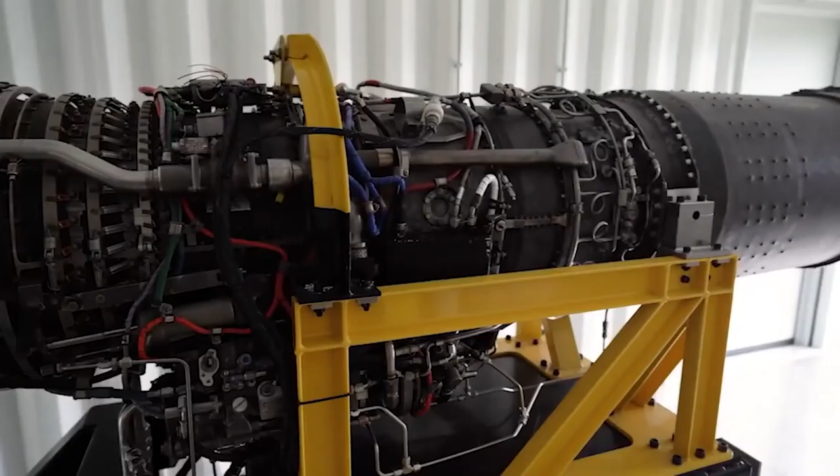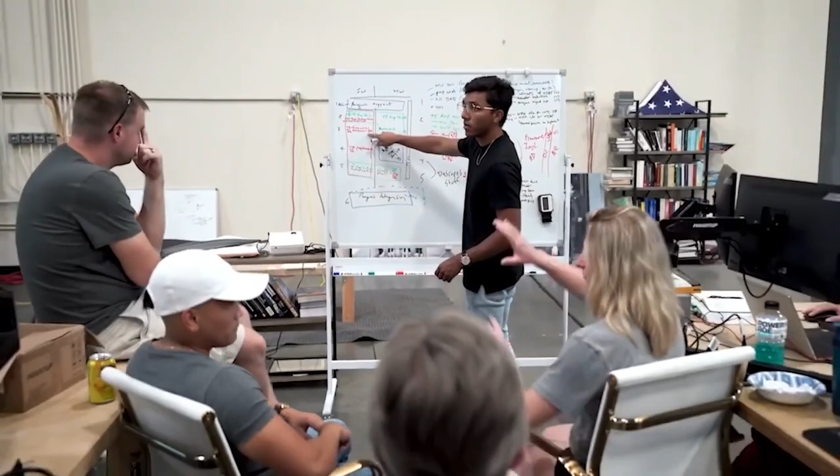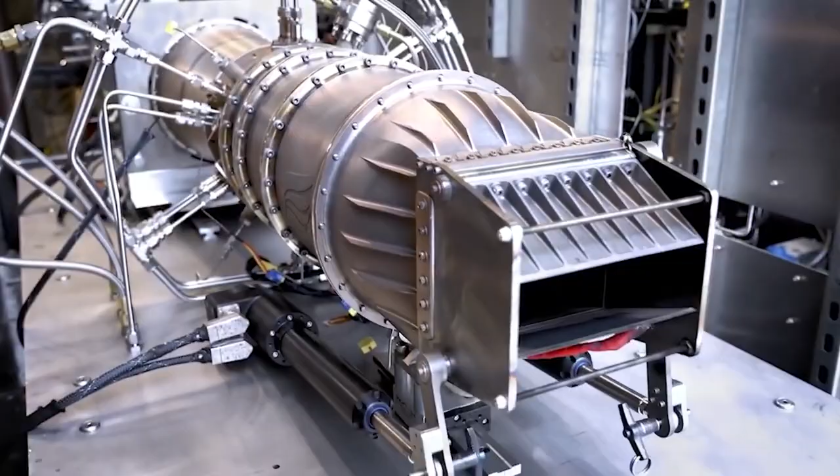The prototype was designed for hypersonic flight with a maximum speed of Mach 5.5, or 4219 miles per hour. Its range is expected to exceed 4596 miles. The Quarter Horse is powered by a turbine-based combined cycle engine, TBCC, that the company is developing based on the GE J85 for takeoff and landing. During flight, it feeds air into the ramjet engine, boosting power to the levels needed to achieve such crazy speeds.

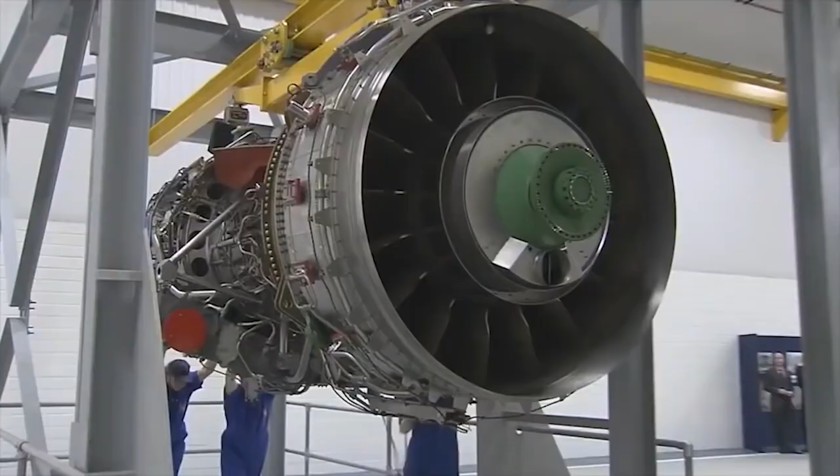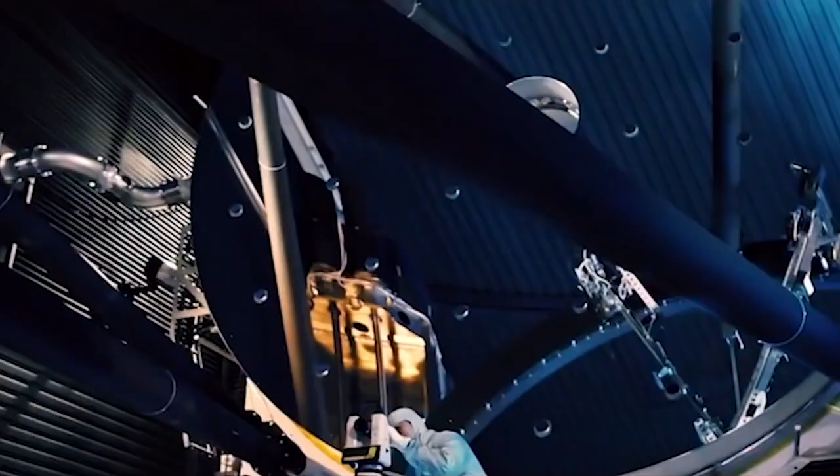Hermes has announced $100 million in funding that it says will help complete the development of the first prototype aircraft, with first flight scheduled for 2023. During these 3 years, the startup must build and test 3 of its prototypes, as well as conduct flight tests for the multiple hypersonic propulsion system. In 2025, testing of the cargo version is planned.

Testing and development of the Quarter Horse and Dark Horse are part of the company's plan to further develop a hypersonic commercial passenger aircraft. If all goes well, after a successful test of the cargo-type model, work will begin on the passenger version, which is scheduled to be tested in 2029. A Mach 5, over 3,000 miles per hour, 20-seat passenger plane called the Halcyon is expected to be able to fly from New York to London in less than an hour.

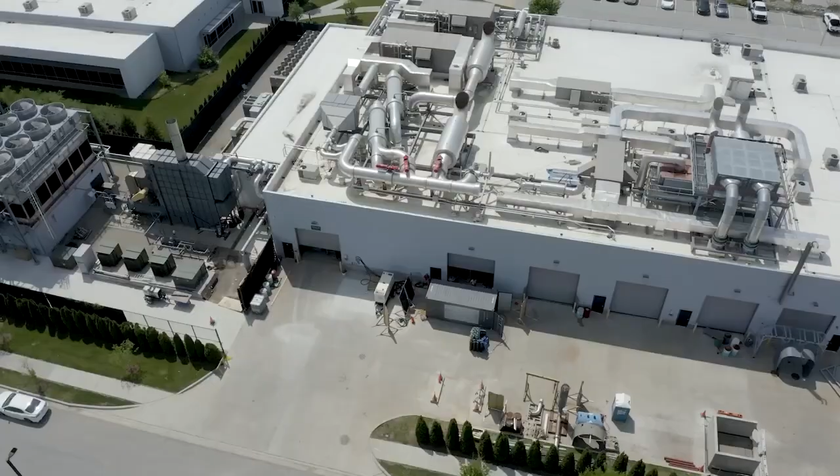The company unveiled its first non-flying Quarter Horse prototype at an event in 2021, where Hermes tested the aircraft's engine. Hermes said last year that it intended to start flight testing the Quarter Horse in late 2022, but in a recent press release it said it now plans to fly in 2023. Another goal within the project is to build and test the hypersonic engine. Hermes has a 110,000 square foot factory in Atlanta and has completed over 100 engine tests to date.

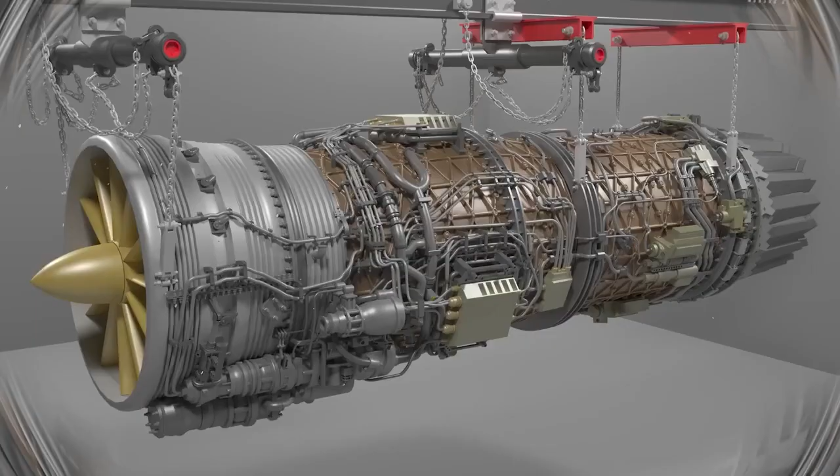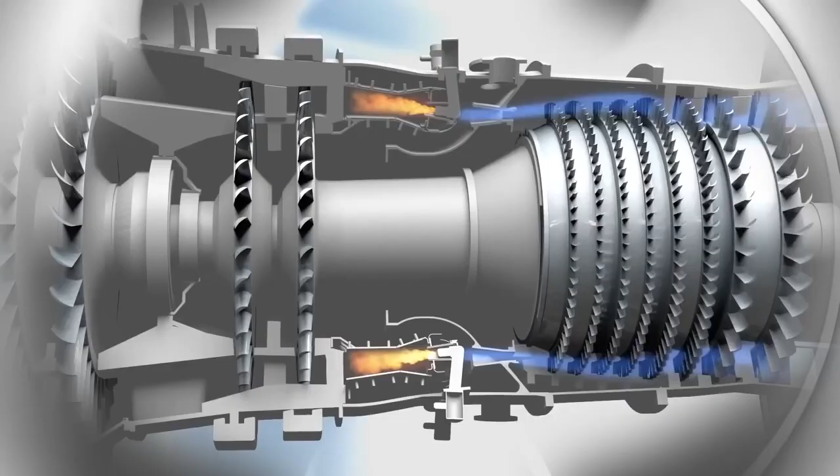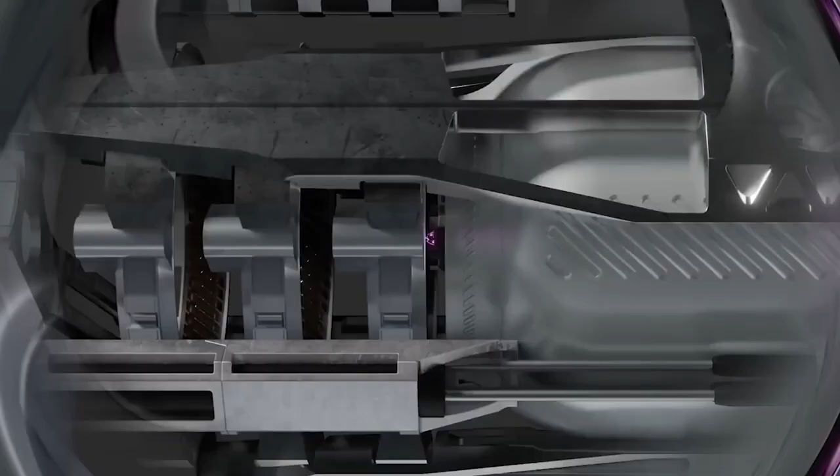At the heart of the effort is Hermes' development of turbine-based combined cycle engine technology. Combined cycle engines operate like conventional turbine engines that power jet fighters and passenger aircraft, but at slower speeds. At high speed, the engine works like a ramjet, pushing more air through the engine chamber to create much more thrust. A traditional turbine engine cannot generate enough thrust to make an aircraft go hypersonic, whereas a ramjet engine cannot operate at lower speeds. In the past, this has led to hypersonic aircraft concepts that use 2 different engines, an inefficient and wasteful approach. The combined cycle engine, meanwhile, can perform both roles, providing thrust as long as the aircraft is in the air.

To test their Chimera engine, Hermes needed to simulate high-speed pressure while flying at Mach 4. So the company packaged their engine and shipped it to the Notre Dame Turbo Machinery Lab, a high Mach test facility. In this laboratory, conditions were created that provided heated air to simulate high temperatures and Mach pressure.

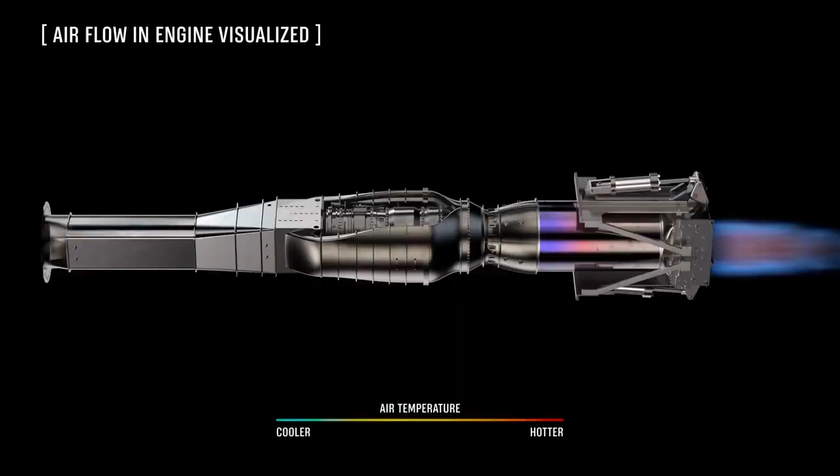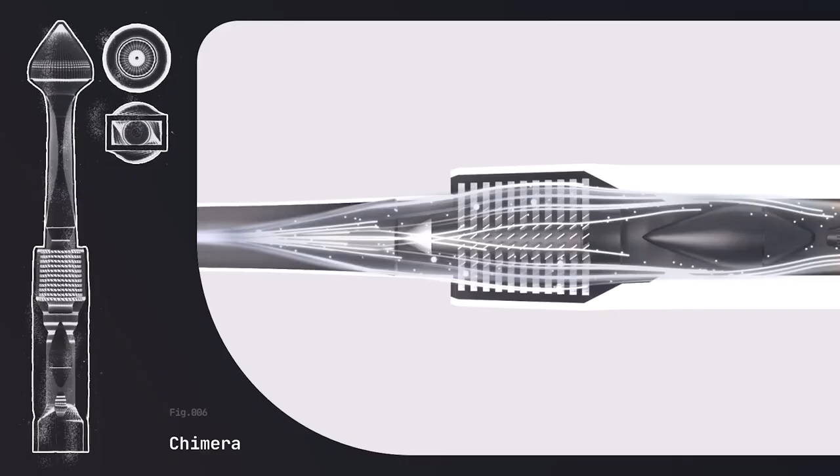Here, Hermeus demonstrated the Chimera's ability to switch between engines by channeling supersonic air around a turbojet into the ramjet. The hypersonic engine for the Quarter Horse is working to combine similar initiatives to usher in the era of hypersonic flight. The Chimera is a turbine-based combined cycle (TBCC) engine, which effectively means it's a hybrid between a turbojet and a ramjet engine.

The ability to switch between these two modes allows Hermeus' first aircraft, the Quarter Horse, to take off from a conventional runway and then accelerate to high Mach speeds. At low speeds, the Chimera operates in turbojet mode, like any jet aircraft.

But as the temperature and speed of the incoming air increase, turbojets reach their performance limit. This happens at about Mach 2. The Chimera has a pre-cooler that reduces the temperature of the air entering the turbojet, which allows Hermeus to squeeze a little more performance out of the turbojet before switching to a ramjet.

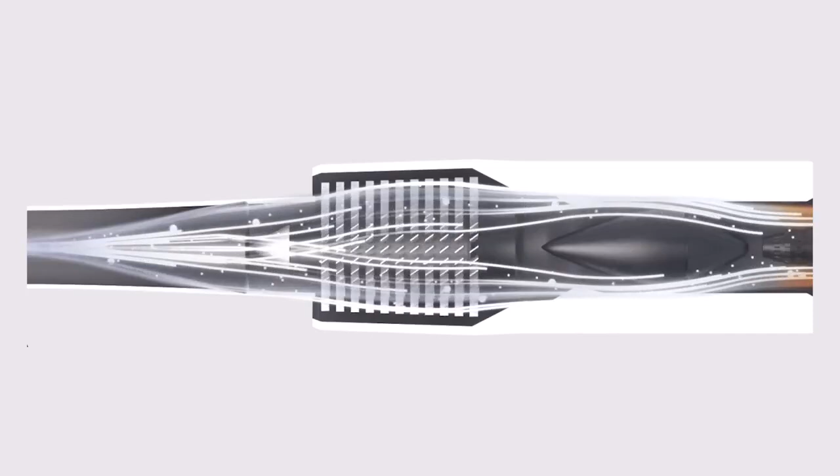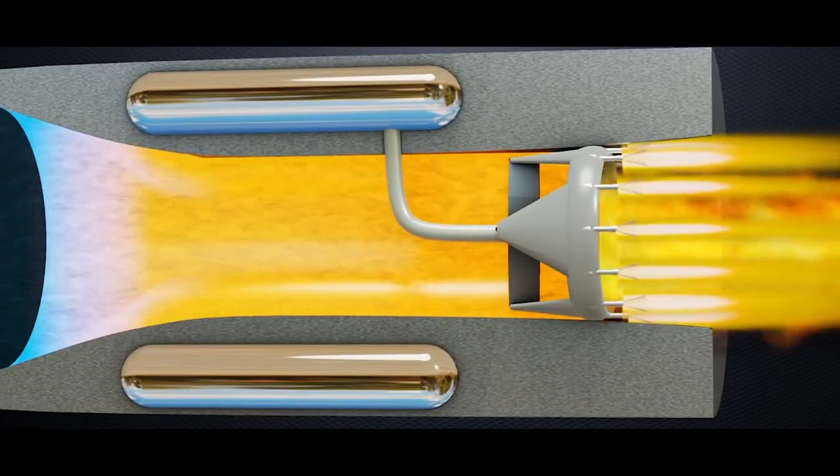At around Mach 3, the Chimera begins to bypass the incoming air around the turbojet, and the ramjet takes full control. A ramjet is a simple engine system that rams high-pressure incoming air to create compression. The fuel is mixed with this compressed air and ignited for thrust. Ramjets are optimal between Mach 3 and Mach 5.

Most hypersonic platforms are powered by a rocket engine, but this approach makes reuse much more difficult and inherently more dangerous for passenger flights. By creating a full-range hypersonic engine that does not require a rocket to accelerate, Hermeus is laying the foundation for operational hypersonic flights, i.e. an aircraft that can be quickly reused.

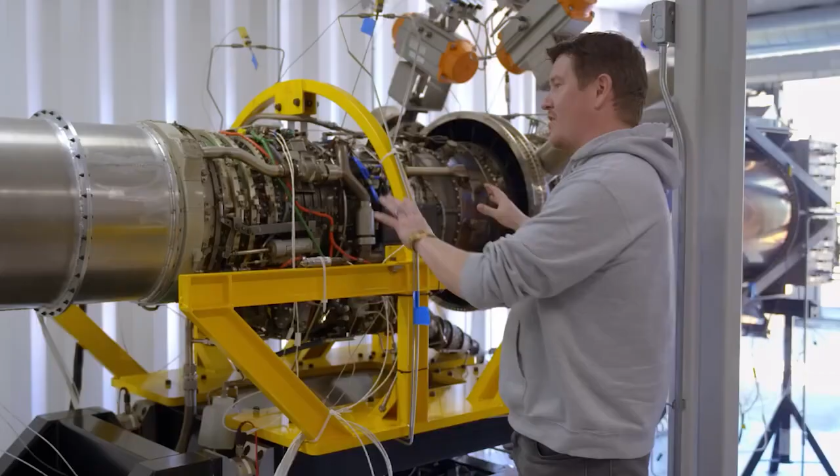An additional advantage of this engine design is that it adapts to existing transport infrastructure. Hermeus aircraft are designed for operation at traditional airports. This is important not only for hypersonic testing, but critical given Hermeus's goal to radically speed up passenger travel with hypersonic flights. Another important factor in the creation of Chimera is additive manufacturing.

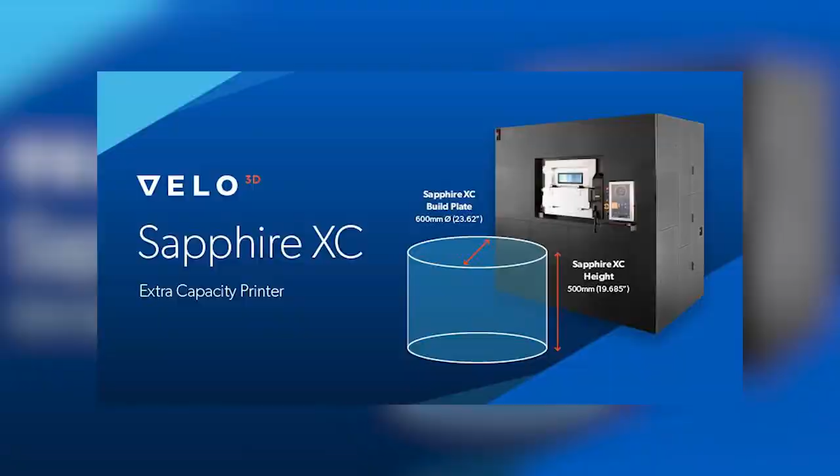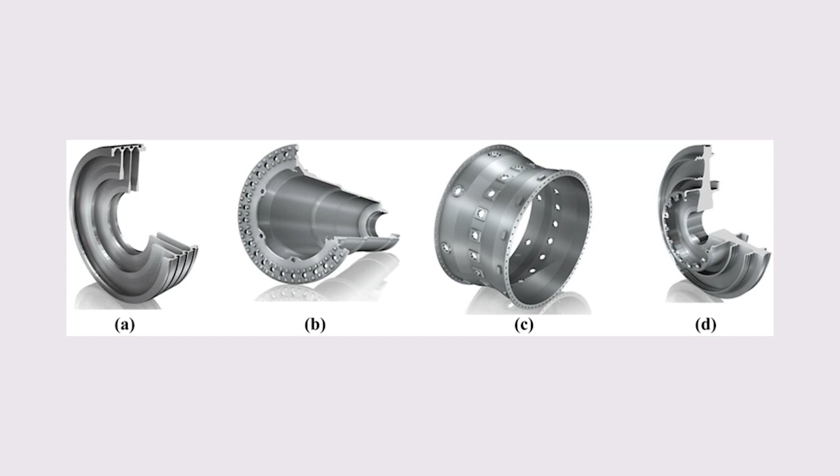About 15% of the engine is 3D printed, which has enabled rapid development. Velo 3D Inc. announced that Hermeus has acquired the original Sapphire and the large format Sapphire XC, intended for mass production. The printers, both calibrated for Inconel 718, will be used to make parts for the Hermeus Chimera engine and Quarter Horse aircraft.

Velo 3D metal printers allow one to create complex, mission-critical parts that were previously impossible to manufacture. The company has previously been a strategic partner in projects with SpaceX, Honeywell, Honda, Chromalloy, and Lam Research, among others.

The price and the speed with which the Hermeus team has reached this milestone is remarkable. Hermeus designed, built, and tested the Chimera in 21 months at a cost of $18 million.

The Quarter Horse is a sprinter, practically the smallest possible airframe for flight testing the Chimera engine in all operating modes and Mach numbers. The Dark Horse will be capable of sustained hypersonic flight and be able to carry cargo or payloads. The USAF wants Hermeus to provide payload integration for upcoming flight tests with the Quarter Horse.

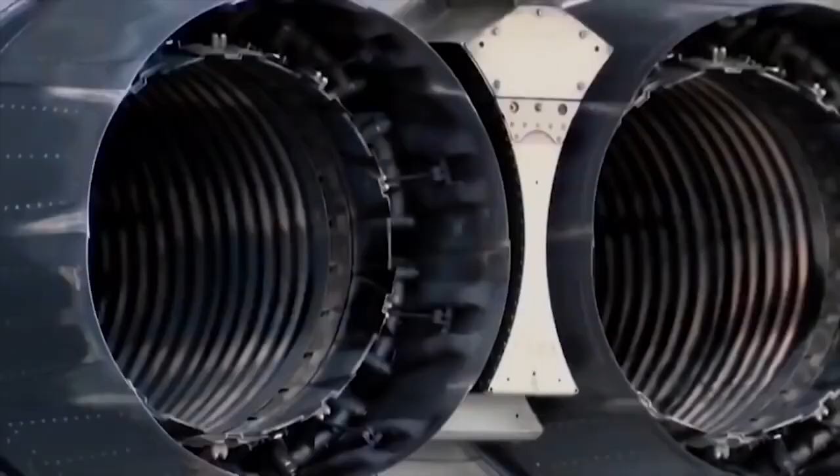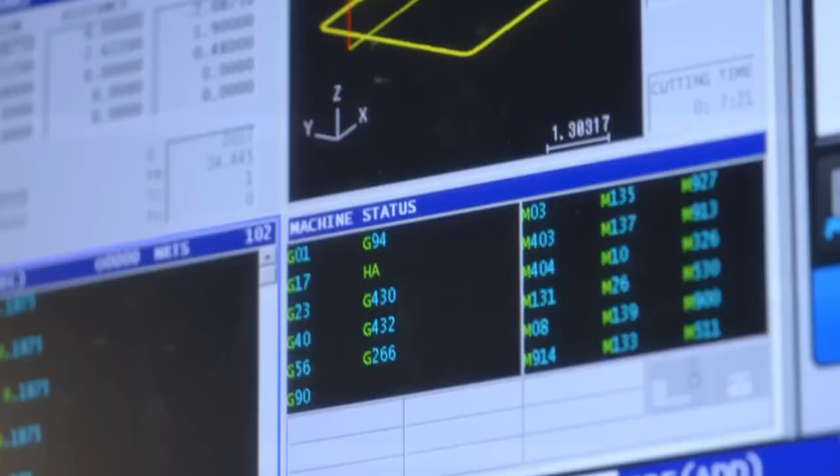Collaboration with the military allows the young company to expand the horizons for cooperation and fundraising. According to the Congressional Research Service, the Pentagon's investment in hypersonic research is increasing significantly, from a $3.8 billion budget request in FY 2022 to $4.7 billion in FY 2023.

It also became known that the aerospace and defense giant's corporate venture capital group, RTX Ventures, has made an undisclosed investment in Hermeus to support the construction of the Quarter Horse.

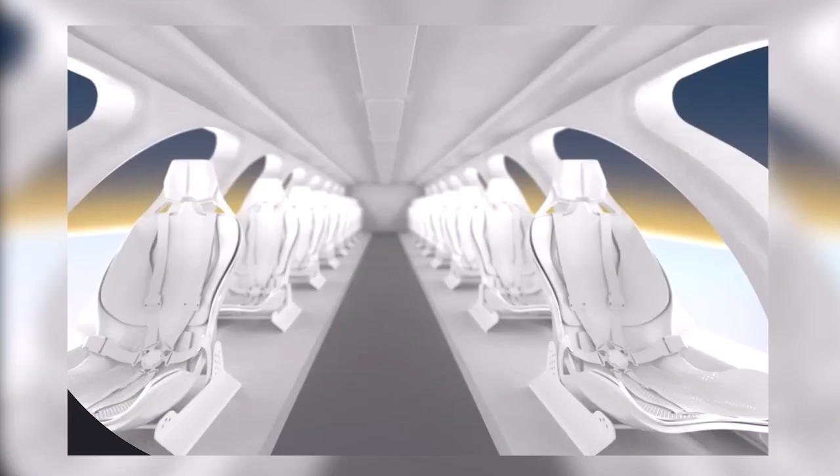Will Hermeus have time to develop prototypes and test them before the end of 2023? And will we have the first passenger hypersonic flight before this decade ends? And should funds from the Ministry of Defense be used for such projects? Share your opinion in the comments below.